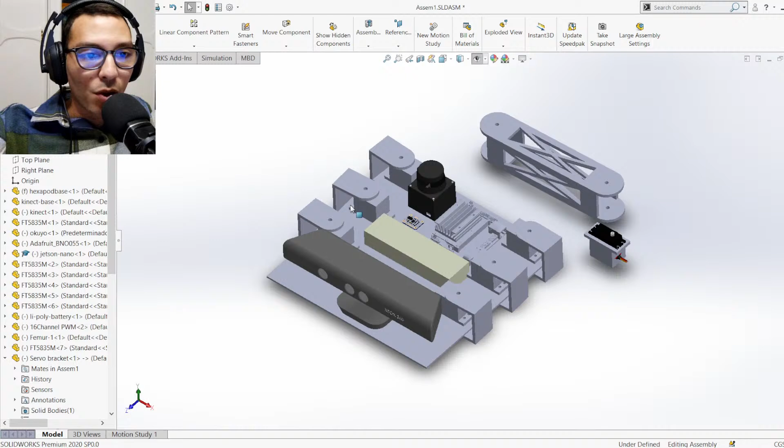But after that, in the actual robot there are gonna be 2 layers of this base. So the camera and the lidar are gonna be on top here, and all the electrical components, including the motors and stuff like that, are gonna be inside. There's gonna be another layer at the bottom with all the electrical components, and these motors are gonna be inside the actual robot, not at the top like that.

So this is just for adding weight until we figure things out. This is not even the actual battery, this is just a box, and I input the weight manually because I cannot find the battery that we need. Last stream, or the one before, I did Google it and showed what battery we're gonna use. I just can't find it on GrabCAD, and I can't be bothered to find it anywhere, so I made its dimensions and weight manually. That's all I need for now.

As well as this one, the NVIDIA Jetson Nano. As you can see, it's even here—I don't know if you can see that sign, this is like a graduation cap, so this is for educational purposes only. That's why it has no color.

I cannot click it. Like if I try to mate it, let's see if I can try to mate anything. It's not clickable, the entire Jetson Nano thing is not clickable. If I click, it will just click below it, or treat it as if it's not there.

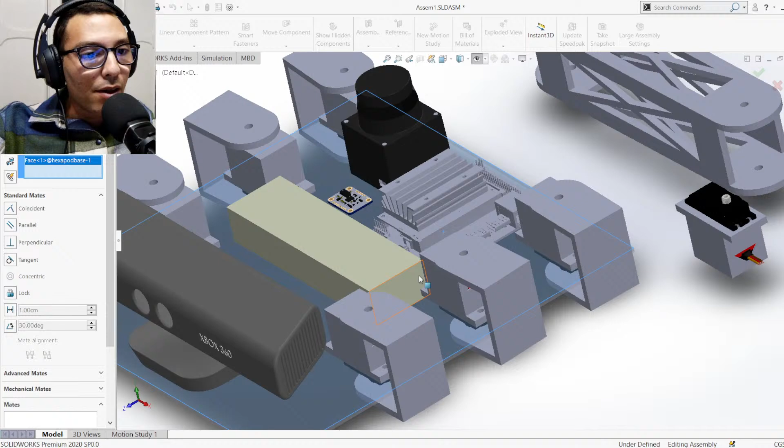So for example, this is not gonna be the finalized placing of the servos. Let me show you something—if I try to move this, this is gonna be the legs moving side to side. If I try to move this, let's say it goes all the way up here. We don't want it to touch. So let's say that's the furthest it can go this way. If this leg is already somewhere here, still not touching, great, okay.

So let's say this is the orientation I'm at right now. The rest of the legs here and here are actually gonna collide, so I'm gonna rearrange everything. This is just, as I said, a preliminary design to get the weights of everything. But this is not the end product, of course. There's a lot to do.

But hey, we're here to have fun, right? And to finish the project, of course. But first and foremost, have fun. That's all that matters to me, to be honest.

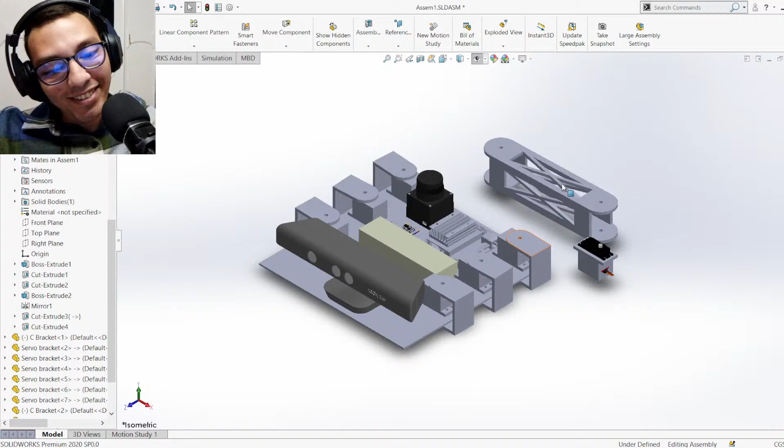So last time, all of this wasn't here. The brackets for the servos, which is the housing of the servo, we just tested it on this one, and we had this attached to it to see if it fits or not and all that. So in my spare time, I added the brackets to each one, and then I added the C bracket here to each servo. That's all I did. As well as, I opened up a space here for the cables to come out of.

So when we actually try to inject this servo inside the housing, it wouldn't be annoying, so I opened up space for it. I fixed the holes for the servo to be aligned with the housing. So yeah, that's all I did in my spare time. But to continue the stream, we're gonna try to connect these brackets to these servos, and then to the femur—that's the femur, right? I believe so, yeah.

Let me see where it is. Yep, it's the femur. Okay, so let's add another servo. We're gonna do this only for one leg and see how everything goes.

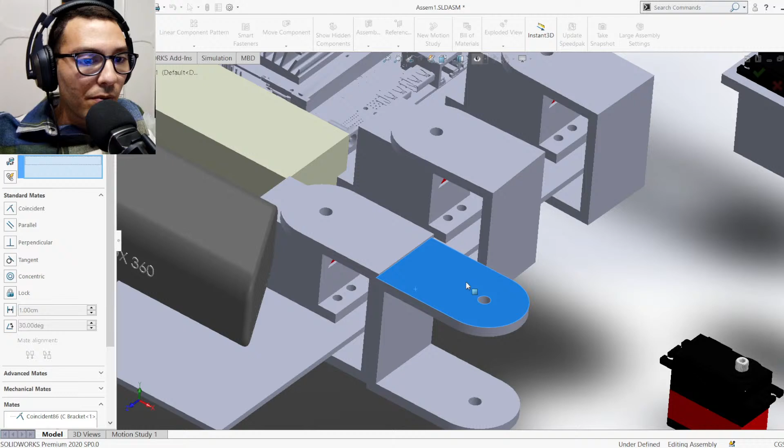So let's take that, space it here. We're gonna have to make holes for screws since all of that is gonna be screwed onto each other, but for now, just for the sake of it, we're gonna mate it right away. So let's mate this to this. Stop it. Okay, and I want to mate this to this. Yep, thank you.

With a distance of... what should be the distance? Let's say 10? Nope, that's... let's say 6 centimeters. Let's see how that... nope, let's have it be 4. Still nope. 4.5, I don't want it to be too low. Yeah, 4.5 is perfect. Okay.

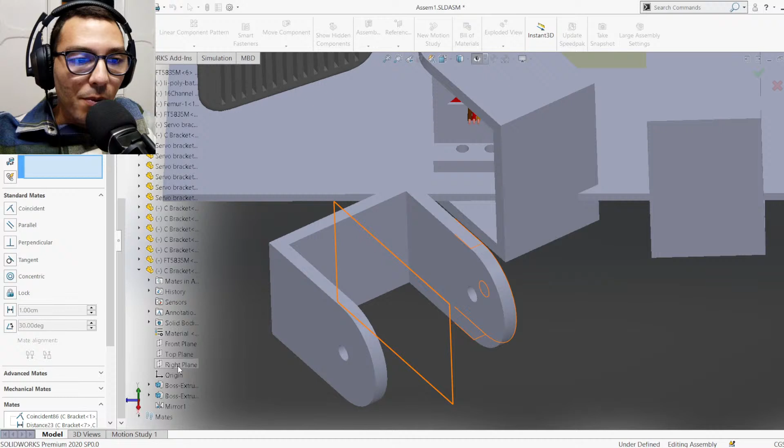Alright, nice. What else? What else can we make? Alright, so I need this, where is it? Yep, I need this to be in line with... where is this one? It's a C bracket, I believe that's number 1. Yep, that. I need this to be in line with this. Thank you. Come on, alright, nice.

Okay, that's actually perfect. Instead of... let's go out of this. Instead of this mate, that distance mate, let's do this instead. Let's mate this dude with this. Okay. Nice, so when this moves, this moves.

And now let's have this. Oh god, everything is starting to be slow already, because I have my OBS on to record and live stream, and then I have Solidworks on, with all these parts in Solidworks already making it slow, so yay me, right?

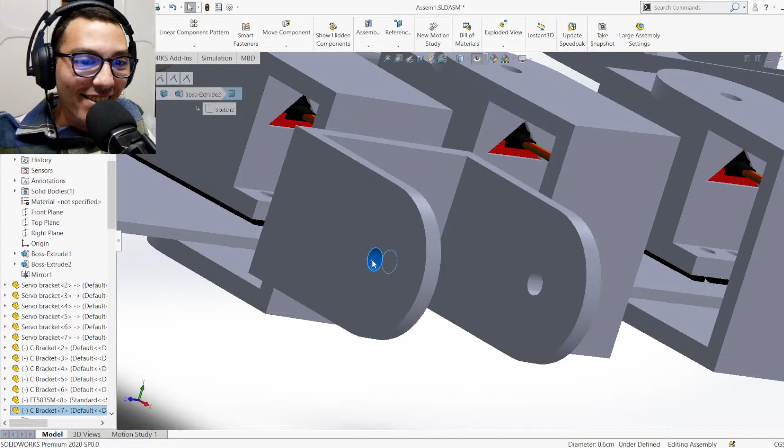We're gonna mate that. And that's a laptop, it's not a freaking PC, so... Okay, come on, you can do it. Come on.

Do I need this to be... yeah, I believe so. I think I'm just gonna mate this to this. I need this to be bigger. Yep. Or actually, yeah, I need it to be bigger. I'm not gonna arrange this one because this should have this. So let's mate this. Oh god, it's so slow! God damn it.

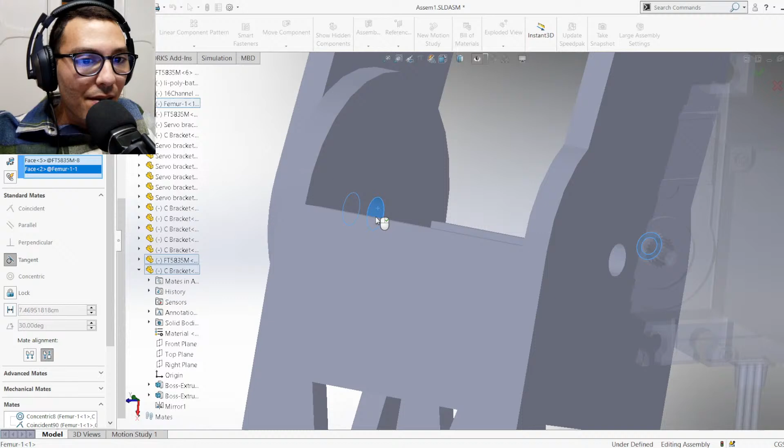This is gonna be concentric with this. Why tangent? I need it to be... oh yeah, okay, never mind. I'm just not gonna use this space, I'm gonna use this instead. Concentric. Thank you.

Where is it? Okay, so this needs to be... where? There. I need that to be here. Cool, now I need all of this to be inside. So I'm gonna have to have that face with this. Not that way. How about this? Thank you. Okay.

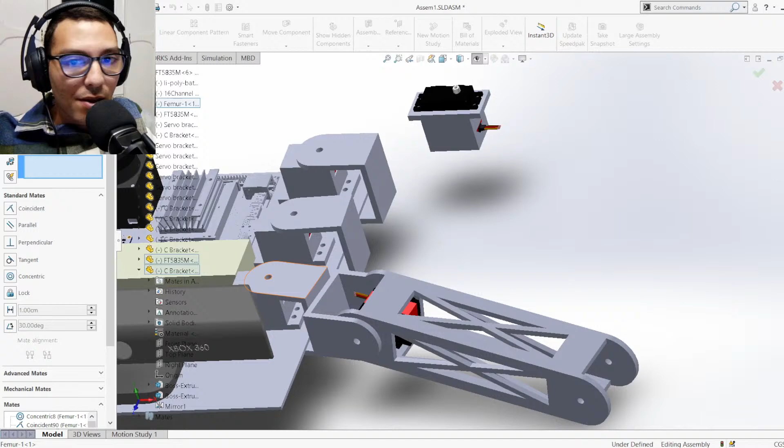So here's the gist of it. If this moves, let's see here. If this moves, so this servo, the first one, will move it right to left. And then this one, connected here to this bracket, will help this femur go up and down. We're gonna fix the dimensions later, because this is gonna take a while to actually figure out the actual dimensions, but for now this is the point. This is the gist of it, indeed.

Okay, now let's add another servo. Where is it? Where is it?

Too many stuff, and it's gonna only get worse. It's not gonna get better.

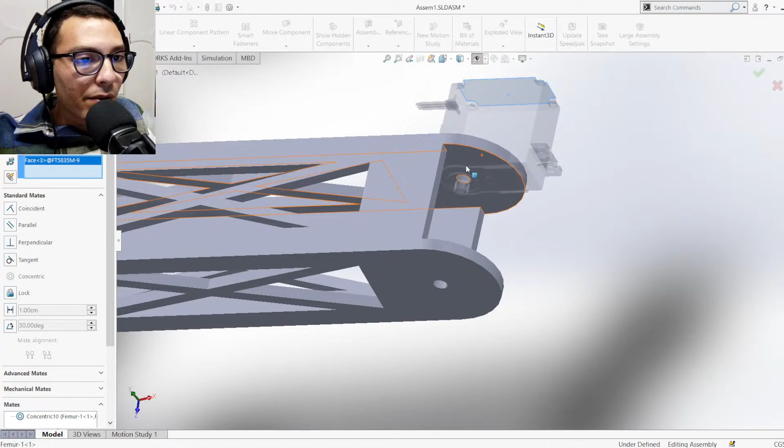Let's add... yep, there we go. Alright, I need this one to be here, with that to be here, just like your brother over there. And this one to be here, but the other way around.

So this one needs to be put with the tibia now. So we're gonna add the tibia. Where is it? Insert tibia. Please move aside.

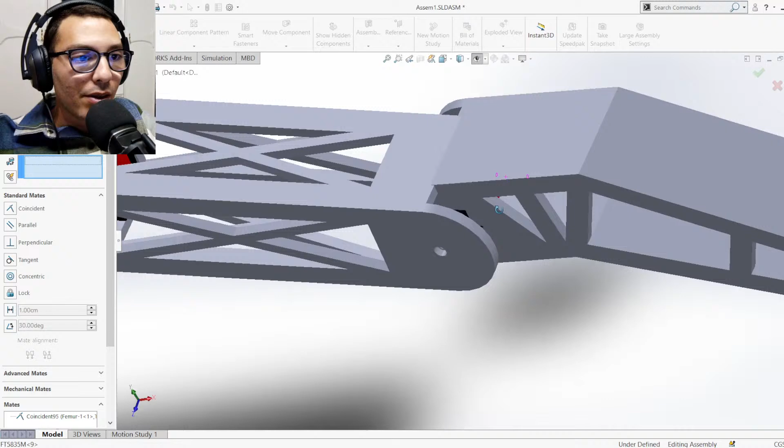And mate. And again, mate, with that. Okay, again, dimensions will have to be readjusted, but for now let's have it like that.

This is gonna have to be bigger. Yep, this is the one that's gonna have to be bigger. Okay, but you get the point that now this will be standing like this, and this will be down here. Hey, our first kind of clean view of what's gonna happen. Now we just need to do this 6 more times.

I mean, easy, right? I'm not gonna do it right now, I'm gonna fix the dimensions first. Let's have this to be a little bit smaller. So how small can this grow?

Let's look at it from here. Where do I want that? I want that to be... can I look at it from here? Nope, I don't want to. Can I look at it from here?

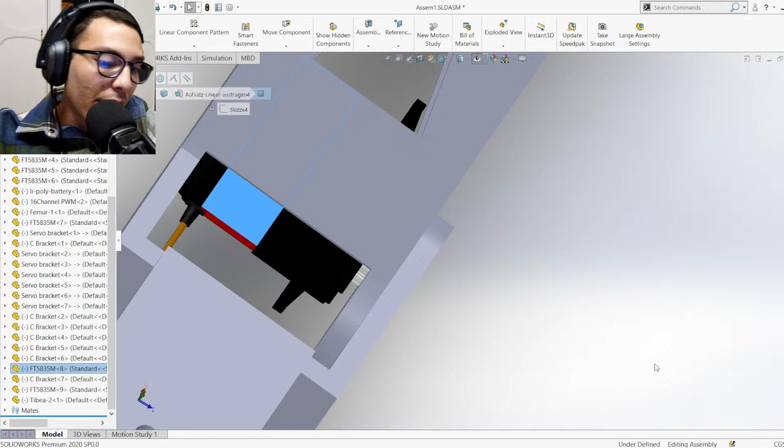And can I measure? Okay, I can get it to be from here to here. Please work, thank you. From here to here. Okay, I need the DZ, so I can get it to be 0.22 centimeters less. So let's open this part.

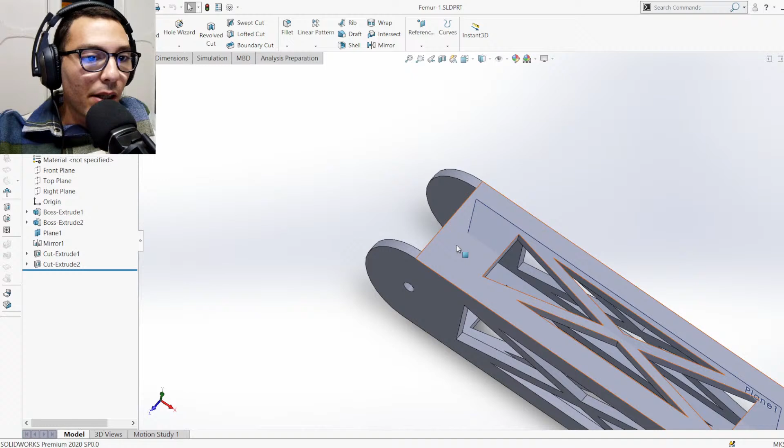Alright, I need that to be wider. So let's edit that sketch. Not that sketch. Where is it? Let's edit. Is it that? Yeah, it is that. Edit.

Guess I'm gonna have to edit the feature. Okay, so that's... what's that in... wait, I need it to be 0.22 centimeters less. So that is 4.5 minus 0.22 centimeters. Cool.

Okay, now let's go and check out what happened here. Alright, that's actually better. Femur 121 has rebuild error. Okay, thanks.

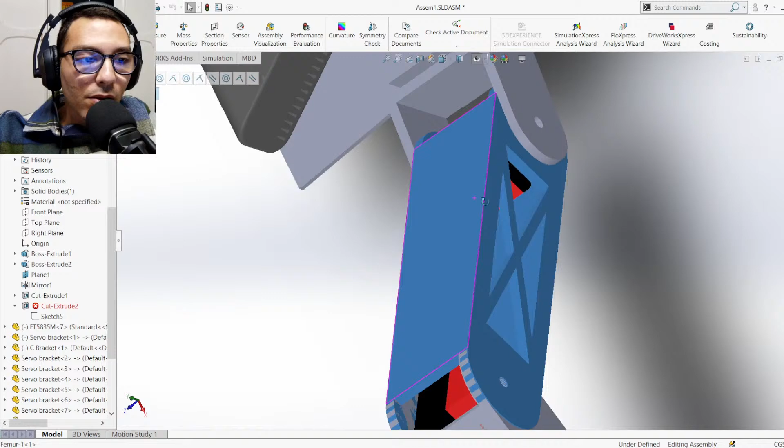Cool, well as we can see, it fits. Yep, that actually looks great. It might have to get a little bit, just a little tiny bit shaved here. But other than that, this so far looks great. So let's go back to the part and see why it won't rebuild.

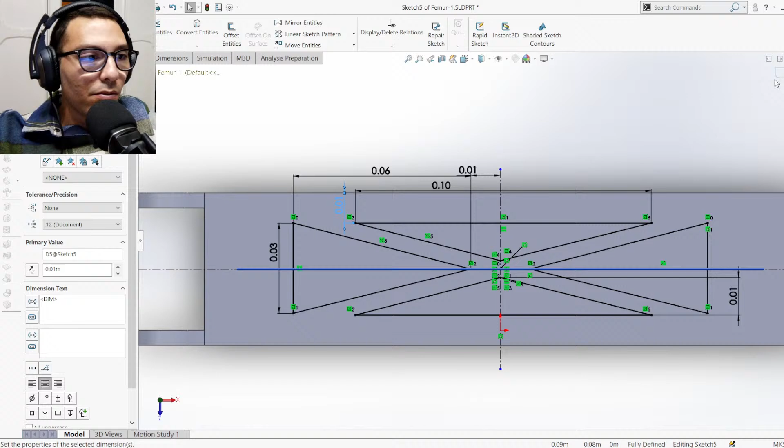Oh yeah, because of the extrude here. Now let's go edit that. Cool, that fixed it. Let's go see if this got fixed. Nice, let's go.

Now let's go make the tibia bigger. Where do we wanna work? Work it. Okay, I believe that's that. So we're gonna edit the feature as well.

Okay, so how much do we want to make it bigger, so it's exactly almost as big as the femur? So we want it to be outside of its... So I made it 5 centimeters, 5 millimeters thick this way, 5 millimeters thick that way. So that's 1 centimeter. So I want this to be 1 centimeter higher.

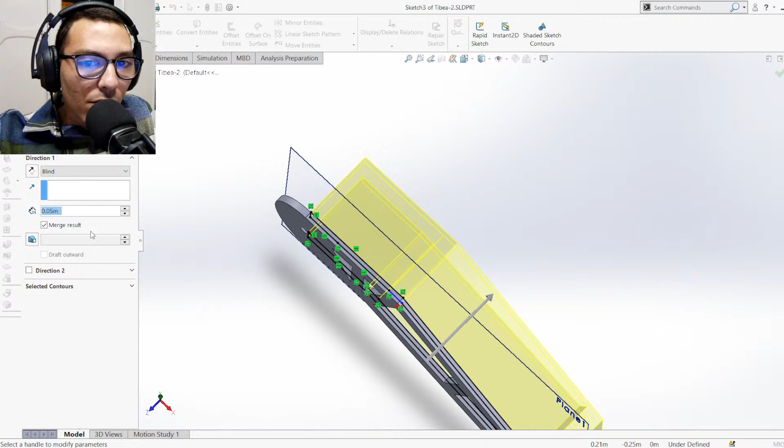Like that, I think. Okay, of course the cut extrude is not great. Now let's rebuild that.

Okay, where's the center of all that? Come on, are you kidding me, trying to get a point. And you... finally.

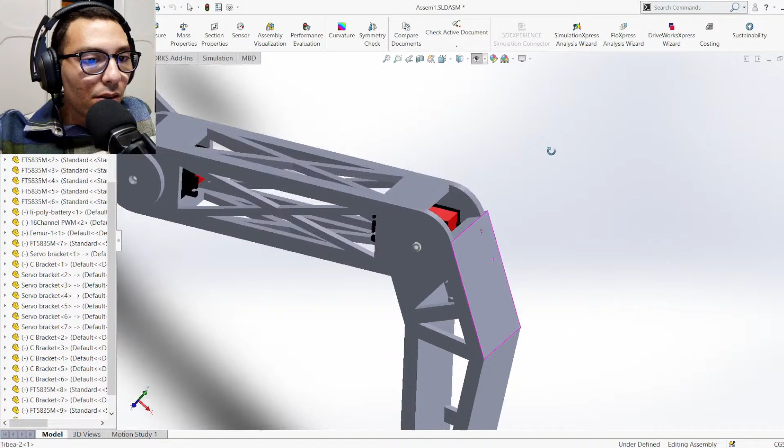Yeah, nice. Let's save that and go see what happened to this. Aw, come on. This should have been a lot bigger. And where the heck is the rest of it? What the heck.

Okay, we gotta fix that. Oh, I totally missed that happened. My bad, my bad, my bad.

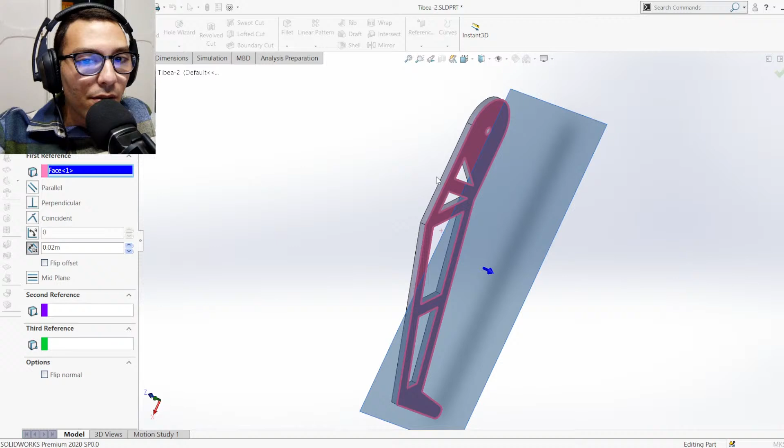First off, I'm gonna increase this. And that plane is not gonna be from here to here, it's gonna be from this face. Okay, let's actually remove the entire plane. Create reference plane, I want it to be the mid between those two.

And now I want you to mirror on this, and I want you to mirror that and that. Right? Right. Okay, much better.

Now let's go edit that. Are you kidding me? Then why are you like this? Okay, let's do that, just remove it entirely.

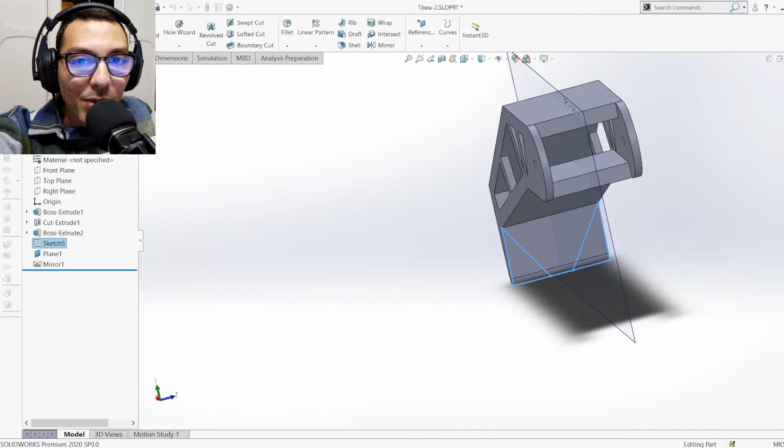And clear that, and extrude cut, through all. An entity with unsuitable geometry. Are you kidding me? Okay, remove the entire thing. Let's work on that. Extrude cut, that face. Yeah, let's go.

Nope. I want... come on, I want the one inside there, which is from here to here. Yeah. We did say 0.015, so let's make it 0.01. Yeah, sure, why not?

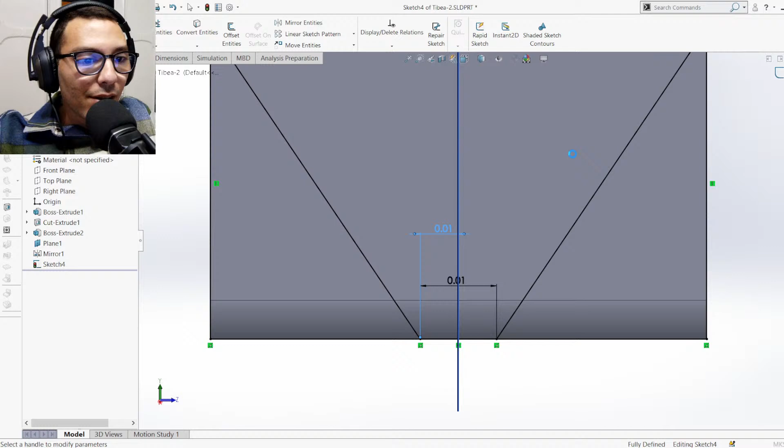Let's do this. 0.005. Nice. These through all. Nice.

Let's save that and go see what happened here. Nice, let's go. Okay, in that, we're gonna remove one of the mates, which is this, and remade it to be this and that. Much better, yeah. Nice.

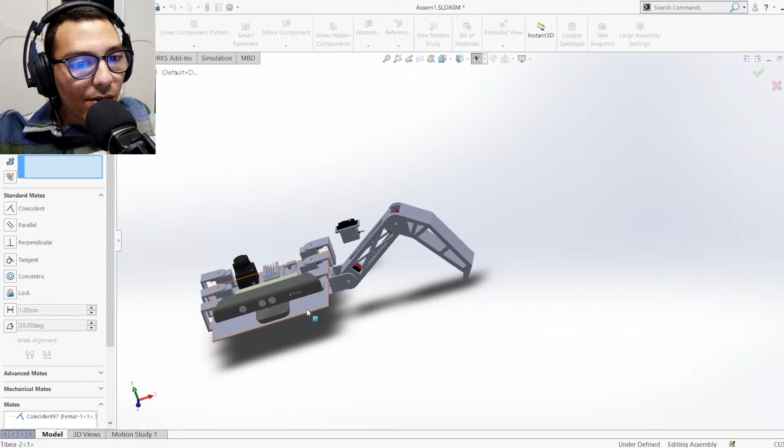So, this is how it should look if it's standing up.

That's long. In proportion, that's a lot longer than that. But, hey, it might do something like that as well.

So we need it to be that long. So if we're looking from this angle, and just in case it has to go flat like that, that's exactly what we need. So you see that? This has to be higher than this.

Actually, I might have to shorten that. So if I shorten this, this goes down a lot, so it can touch even below this. You see what I mean here?

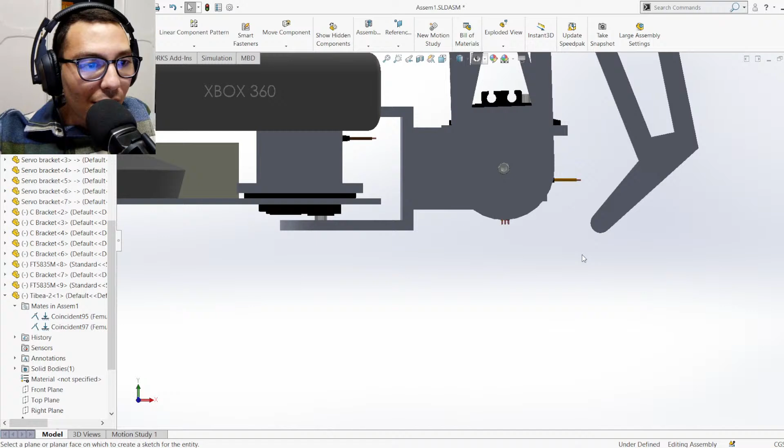I was gonna draw a straight line to show you, but never mind. You get the point. Let's say this is the floor. I need this to be touching the floor first instead of the belly of the robot. So we might have to make this shorter. But for now, let's just keep it as it is.

And yeah. Okay. Huh. What else? What else? What else?

Oh yeah, the thing I was showing you guys earlier - when this goes this way to its max position, here, it will hit that ledge. If this leg even tries to go to its max position this way at the same time, for any reason - I don't know why they might have to do that - this is gonna be a problem.

And this isn't even me putting the other bracket - I didn't even put this bracket here yet. So they are gonna collide in that case, 100%. So this will have to be fixed. For now, let's just keep it as it is.

And drag that back. Okay.

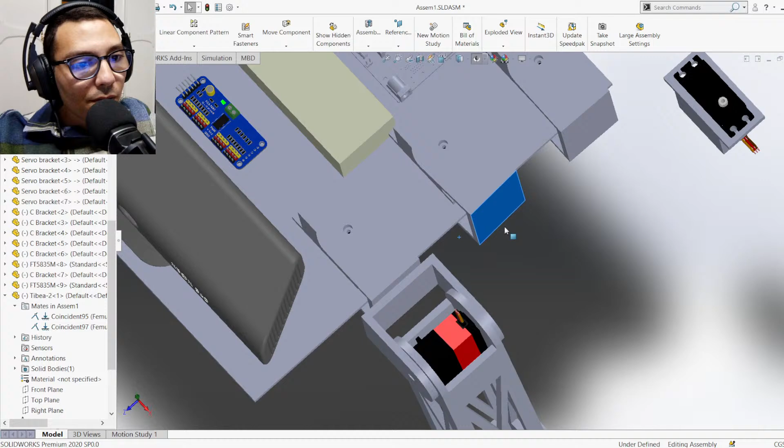It's gonna look like a proper spider with time. But that's the grind, right? That's literally it - to keep trying these things and keep checking out more stuff.

So we don't need that, actually. What else do we want to do? I forgot. Oh yeah, let's fix...

Actually, I want to do all parts first. So let's add - let's do this. This. Nope. Where is it? I think it's that. And...

Where is it? I don't know if this will work, but let's do this. So a femur and this, that, and the tibia all copied and pasted here. Yeah. Do they have their mates? They do.

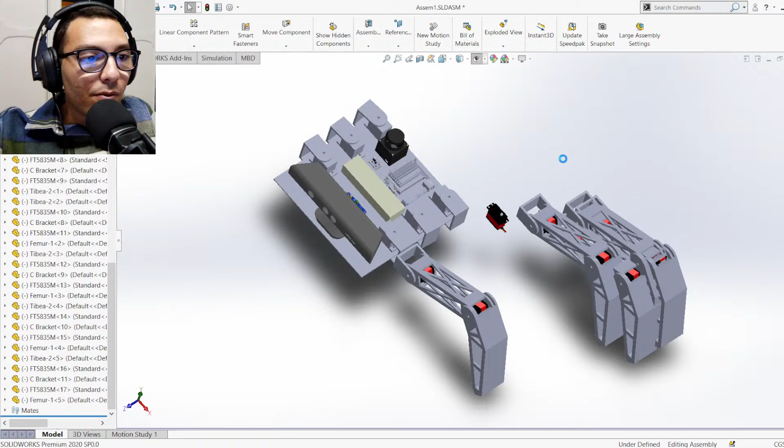Great, let's do this 3 more times. Yep. It's a bit clunky, but we're gonna just do that.

Okay, let's start mating. Hey, no, not like that. Not like that. Okay, chill. Not like that - I meant to mate the parts in SOLIDWORKS. Good God, working this is gonna have me arrested.

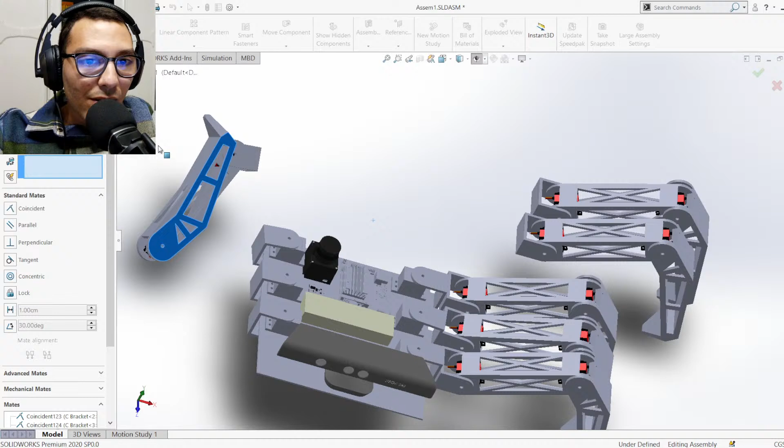Huh? Okay. Weird. Anyway. It's so freaking weird. Yeah.

Let's go. Where? Oh god. Um, what's that? I don't need femurs, I only need C brackets. Okay, this C bracket.

Okay, so we're dealing with the right side of that, with - okay - this right side with front. Okay, and then that right side of that with the front of that. Great.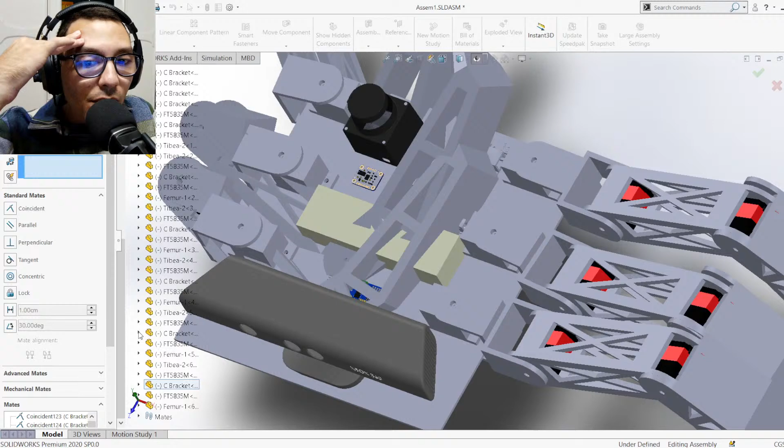Okay, next. This C bracket. Oh god, no, I want this - C bracket 10, right side, with C bracket 3. It's supposed to be right. Nope. With the front. Thank you.

And then right side of that, with C bracket 10, front. Okay.

Oh god, no, what did I do? Wait. I want to fix this first, because I want to have at least one side that's perfect. This edit feature.

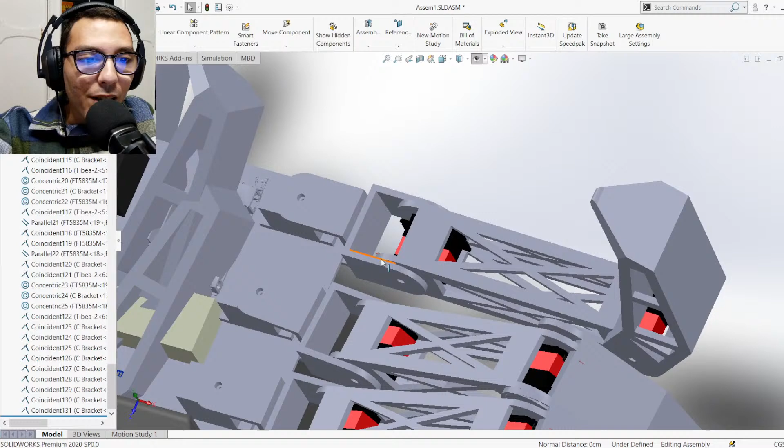Can I have them flip? Okay, but I wanna flip them. Nah, nah, please, nah. Okay, why? This, yes.

I need it to look the other way. Come on, how do I do that? It's supposed to be like that. How? How? How? Just how? Huh? What?

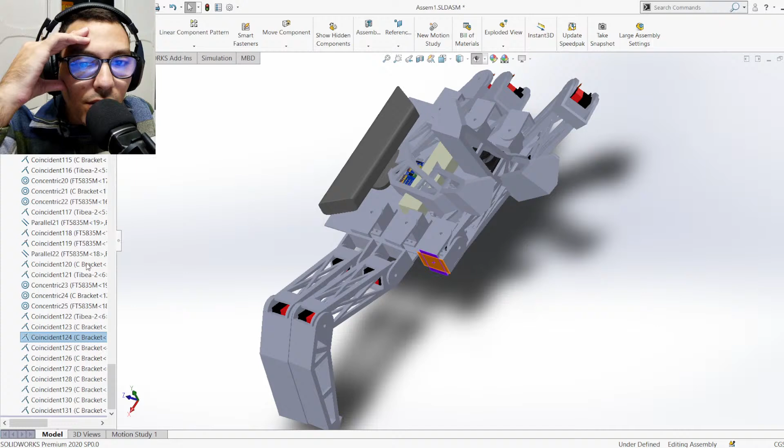Okay, let's see this mate then. Where is it? Yep, that mate - if we do this. Come on. Okay. Yep, that should fix it.

Thank you, thank you, now stop being an idiot. God damn, you had me scared for a sec. Okay, what were we doing? Oh yeah, these. Good God, man. What's that? 4 and...

8. Okay, 4. Where's 4? C bracket 4, front, with C bracket 8.

C bracket. Come on, 8, there it is. Okay. This? Nice.

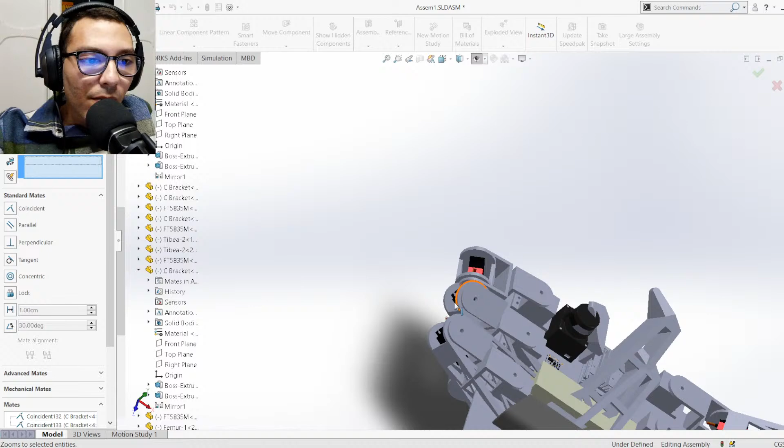Okay, now front and right. Nice. Okay, we got this, we got this. Okay, okay, huh, this feels exhausting, by the way. Just saying.

One wrong move and all of that is gone. 5 and 11 - 5 and 11, nope, that's a femur. Get back here. Chrissy, wake up.

Okay, that - right side. 2, that's front. Nice.

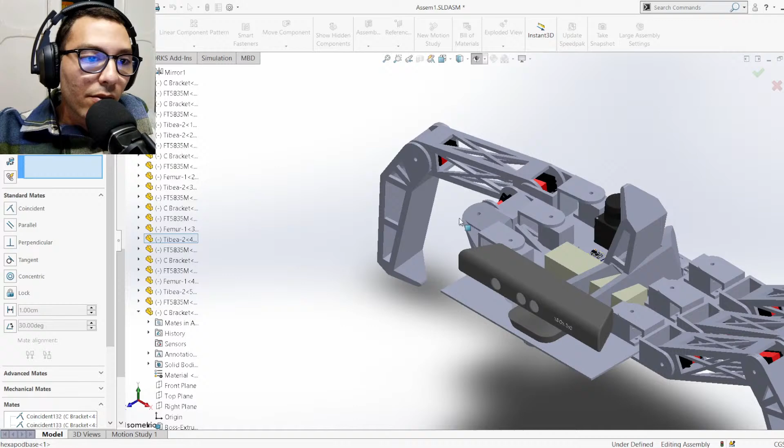And then that right to that's front. Okay. Not too bad, not too bad.

Okay, get down, thank you. Last leg, last leg. 6 and 9.

Where are you at? C bracket 9, and then C bracket 6. This front to this right, and then this front to this right. Thanks.

Wait. Can you stop? Thank you. Okay. Freaking finally. Hey, we're getting somewhere, kind of.

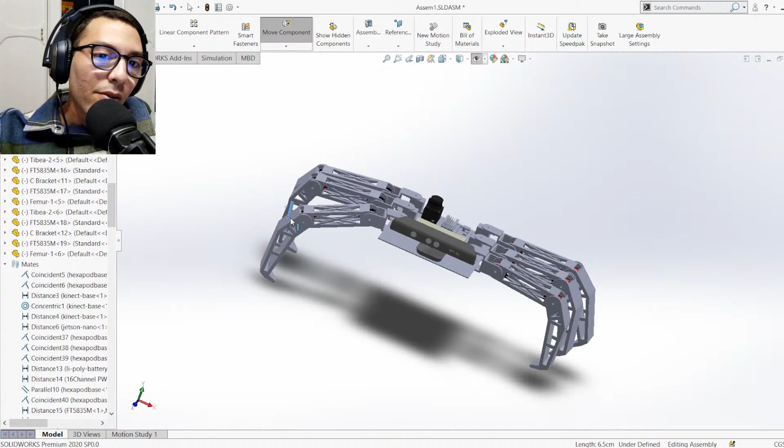Let me actually do this. Nope. Let me check this out. I need an isometric, trimetric? Yep.

I'm gonna just screenshot that for a bit.

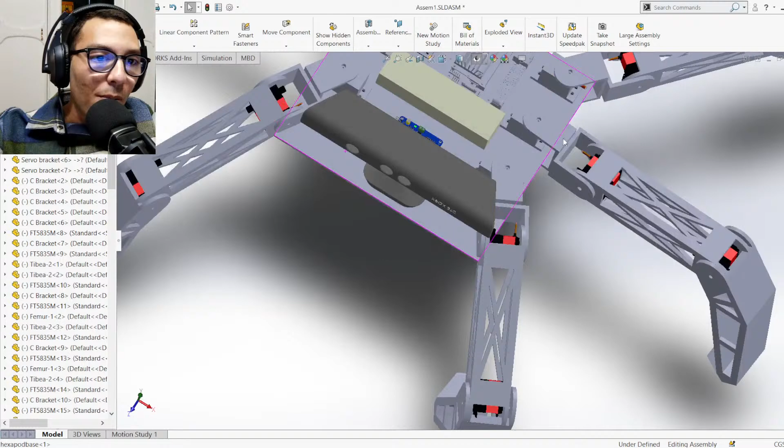So all of this is gonna be shaved, like this entire place is gonna be shaved, as well as that place, as well as the ends. These are gonna be separated more apart, so this entire thing is gonna get longer. But for now, so far we're looking good.

What else? Not really sure what to start with. So basically, we can start simulating, kind of. We can make everything defined and then start simulating. But to make every single part of this fully defined is gonna be kinda hectic. So let me see what else can happen here.

So what do we have? We have a mate here, doing this and this. Then we have a mate here. So how can this move? It can move sideways, okay. Can it move upwards? Nope. It can only move sideways. Okay, let's have that.

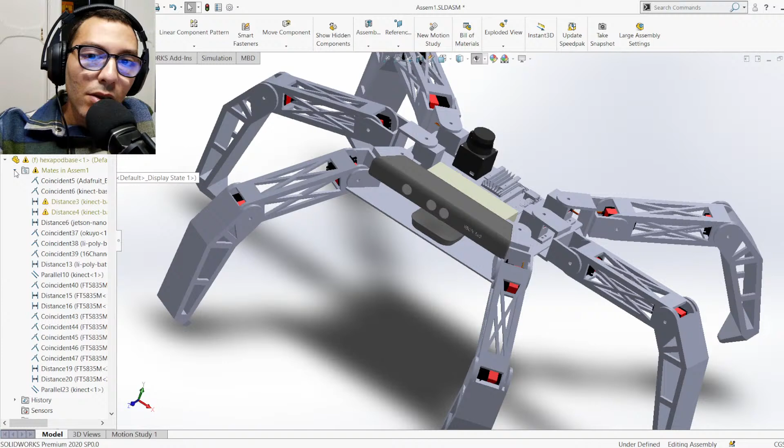Okay, but if I don't do that mate, it's gonna move. So let's say we delete this mate. Now this can move. Well, we can actually not do that mate.

Um, what else? This can stay as it is. All of that can stay as they are. If I try to simulate just like that, everything's gonna collapse. Or not collapse, it's just not gonna be working well or give accurate data. So we can do this.

Where did I go to start simulating some weights? Okay, first we need to make sure that this— oh yeah, simulation, cool, new study. Wait. This might make everything burn out on me, so we're gonna save and hope for the best.

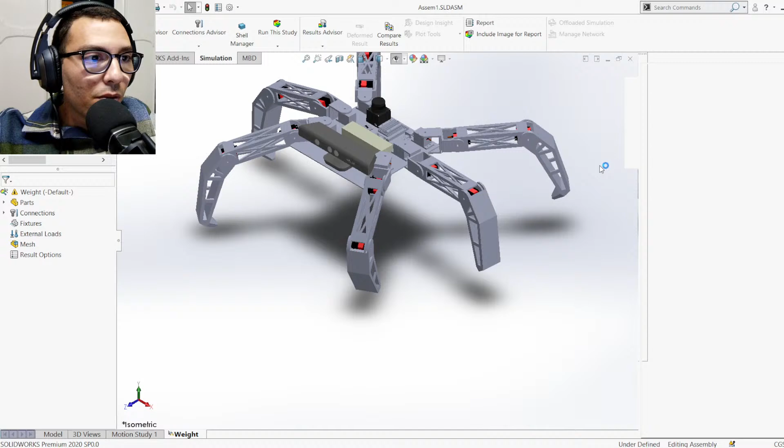Okay, so where do we want to fix this thing? Okay, fixtures. Nope, not that, thank you. Fixed geometry. Okay. Actually, in real life this is gonna be standing on those, so let's fix it there and see how this goes.

I know it's not fixed, like I know that the entire thing is not fixed on the floor actually, but just bear with me, I'm testing some stuff here. What's up, Farid? We're kinda simulating something. It's gonna be so bad and everything is already moving very slow, so just bear with me.

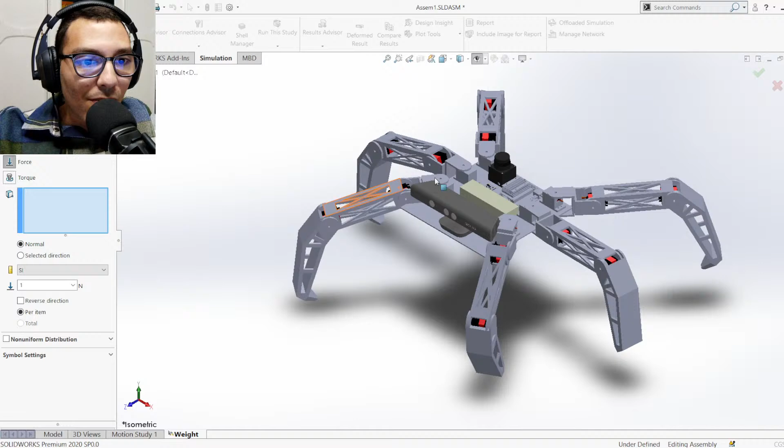External load, it's gonna be force. Let's say this entire thing is 5 kilograms, that's applied here. Let's say, actually, one sec. Not sure which one I should go with, but let's go with force. Let's keep it simple, applied here. Yep, SI, let's do 5.

Yeah, it kinda does look good, but as you can see, a lot of stuff are clipping through each other. All of that's gonna get fixed, but so far this is how everything should look. This is gonna get shorter, the femur is gonna be shorter, but this is how everything should look.

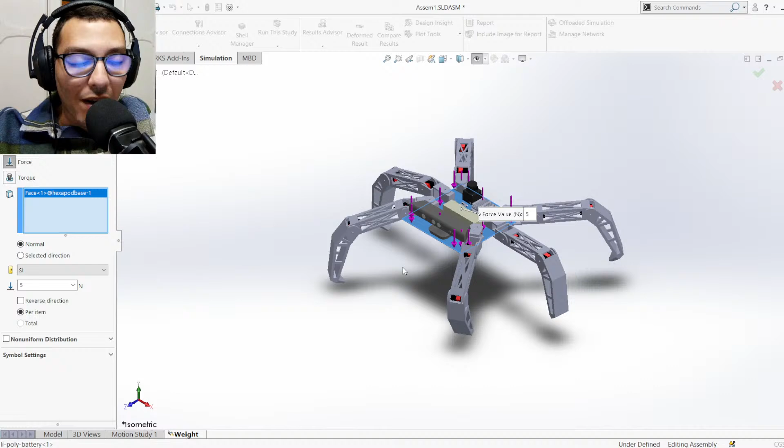Fixing everything to be fully defined, as in mate everything, is gonna take a lot of time. So we're just gonna kind of see what happens if we try to do this without much fixtures.

Okay, let's try to mesh at— let's try to mesh at 4. Oh okay, thickness is not defined for one or more shells. Great. Actually, it's not gonna mesh at 4 because it's not gonna be able to mesh this. Which is the problem?

Let's see, thickness is not defined for one or more shells. Well, if this doesn't work I'm gonna try one more thing. So 0.5 centimeter, which is the thickness. Okay, I don't think this is gonna work like that, so let me try something else then.

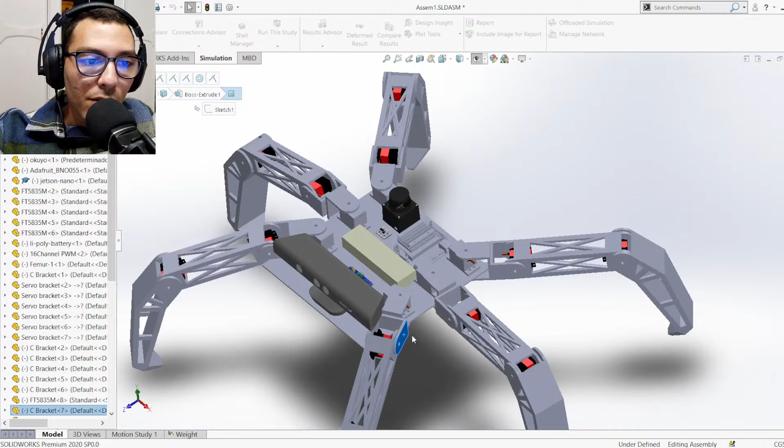Where was it? Here it is. What's that? So that's gonna be C bracket 7, plus this, plus this, and this and this. So these are the things that I need. This, that.

Yeah, form new subassembly, that's exactly what I was looking for. Ah, I'm glad it's there, because I wasn't sure that this could be done. So yeah, this I need to open that subassembly, and then we're gonna simulate that.

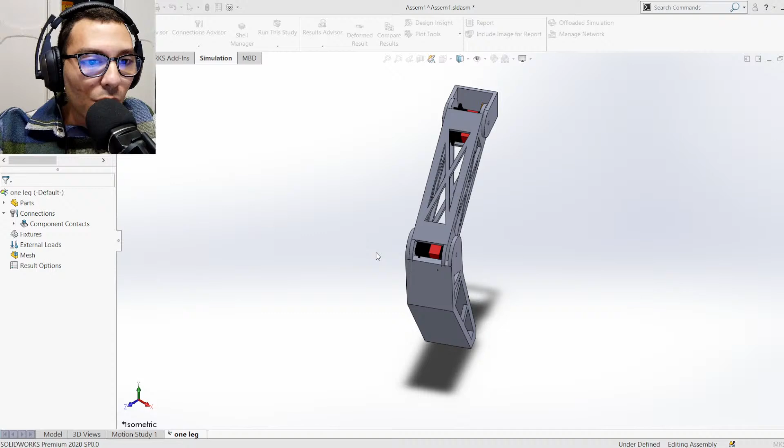It's the servo. Okay, both servos failed. Refining of the mesh. I know why they failed. Trying to know why they failed. Because I meshed on 2 centimeters, and then we have these. It's trying to put 2 centimeter triangles in here, but it can't. As well as these, it won't be able to do that. So,

For now, what we did, let's just see here. Fixtures, fixed geometry. It's supposed to be fixed here, because that's what's touching the floor. What else? What was I gonna do? External loads, yeah.

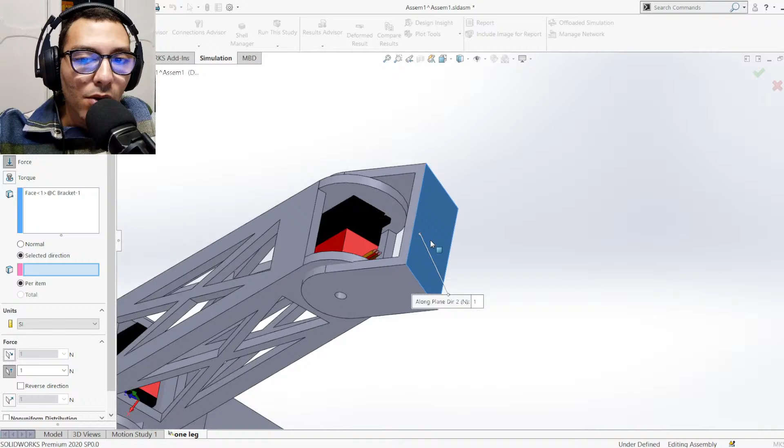Where external loads, force. It's on this. Select direction. Want to see it though. Why won't you show it to me? Weird. Oh, because I didn't click, my dumbass. It's the reverse direction

of, let's say, 5 divided by 6. Let's say each one will handle 3 newtons. Each one will handle, let's say, 2 newtons. 2 by 6 is 12. Yeah, the entire thing is gonna handle 12.

Or in some cases, because let's say that this spider is walking, right? So only 3 of its legs is gonna be touching the ground at a time. Let's say there is one of the patterns that will have 3 legs off the floor and 3 touching the floor at a time. So we need the entire thing to be held on 3 legs. So let's say 10 divided by 3, that's 3.333, yep. Let's say 3 newtons.

What else? What else? Don't think there's anything else. Here. Well, that stopped my camera.

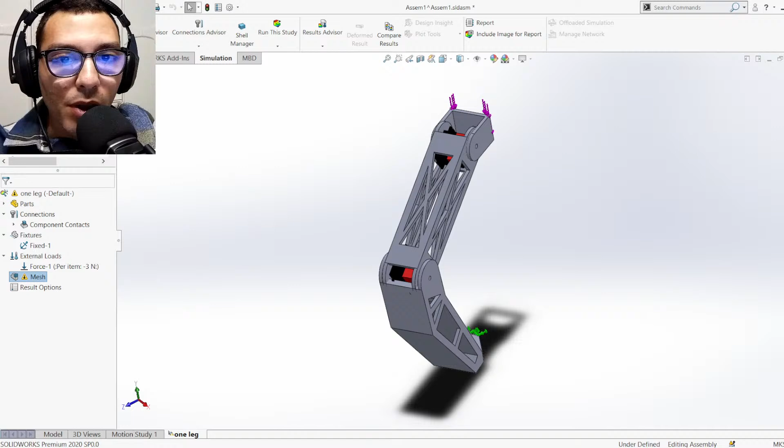Okay, so we meshed. Create mesh and run. And let's see what happens. It's not gonna be great until we solve a couple of issues. I'm gonna have to remove the servos from the mesh. So let's suppress that.

Whoa. Why you do me like that? Where is the wrist? Brother, what are you doing? Hello?

It's not suppressed. These are the ones. Okay, let's just suppress that. And that. Okay, now mesh and run.

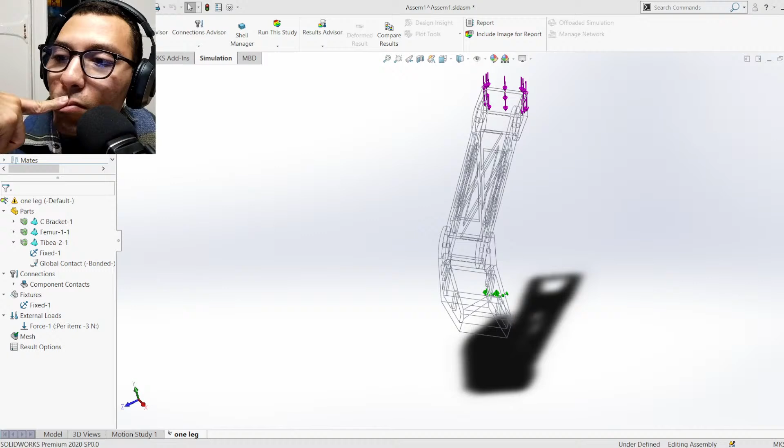Okay, let me show you guys this. How can I show it? Add image source. Nope. Yeah, that. Why won't it show? It's not showing. Huh, okay. Give me a few moments to figure this out.

Okay, for now we're gonna have to work with this. So anyway, we're using PLA. So I got the data sheet for PLA. So we can actually just go here, for example. We're gonna go where? So we're gonna go here and tell this entire thing to make it out of, change material.

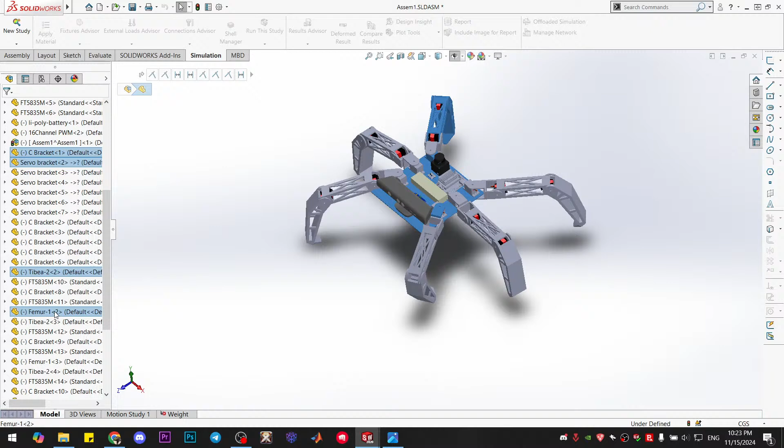This is what we're gonna do right now. This, nope, not the base. What else? The base. The bracket. The servo bracket as well. Tibia and the femur. So all of them, we're gonna make material.

Where is the material one? Yep, material. Let's just add the femur. Yep, thank you. Material, edit material. Custom material. So PLA is a kind of plastic, so we're just gonna add new material, call it PLA. It's not already in here.

Is it? Oh, ABS is in here. Huh, so PLA must be in here. I genuinely cannot see. Where is it? PVC, PVC. Yeah, it's already... I'm in plastic right now. Anyway, PLA and ABS are kind of the same thing, so we're just gonna use ABS.

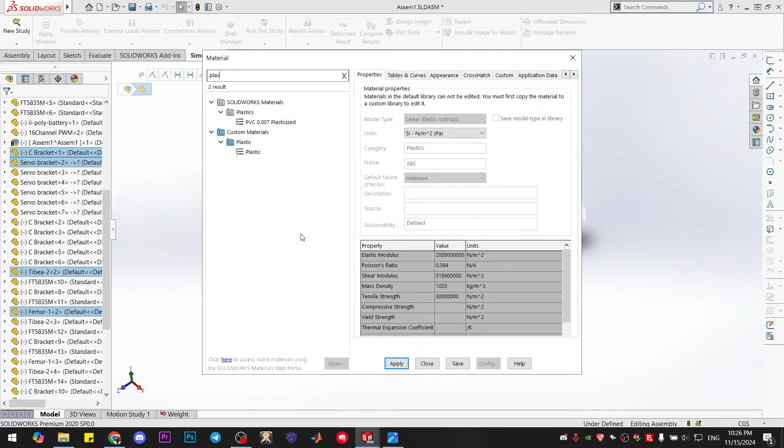And there is... You mean the plastic I made? Or the plastic, this PVC plasticized? Because this plastic I made, this one. This isn't the custom materials that I made, so that's why I just went for ABS. You have changed custom materials, they want to save. Nope. Oh god, that's too bright. Good god, man. Ew.

Anyway. That works. Yeah, ABS is very close. It just looks horrible. But anyway,

Yeah, so since we switched to that, let's go back here. It should fix everything now for the simulation because we added the material. So go ahead, mesh and run, my friend. Oh yeah, this is gonna fall from over there.

Iterative solver stopped, numerical difficulties, pre-condition failed. Please check model boundaries and conditions, no results saved. Assembly 1 failed. I know, because I didn't fix everything in place.

So if, realistically, what's it telling us here is... I'm not really sure why my camera is not on anymore. Give me a sec. Yeah, way better.

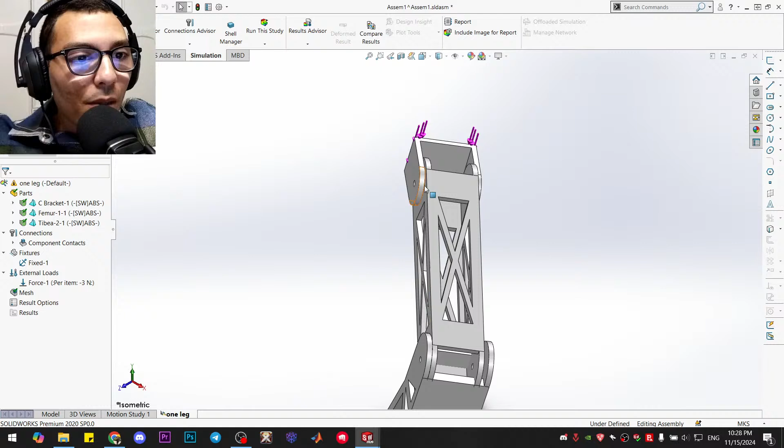Okay, so basically what it's telling us is this. If I apply pressure here, let's do this. So if I apply pressure here in real life, and this is fixed to the ground, I didn't tell it that this is gonna have a servo here that's actually holding it in real life. But to the simulation, if it applies pressure like that, it's just gonna fall apart.

So if you go here, if I apply pressure, it's not doing what I want it to do. Let's look at it from this angle. If I apply pressure here, this entire thing will collapse, so it will close in on itself. That's what it's trying to tell us, because it's not fully defined. As you can see, the dashes here mean that it's not fully defined, so I have to fully define it first and then tell it to simulate.

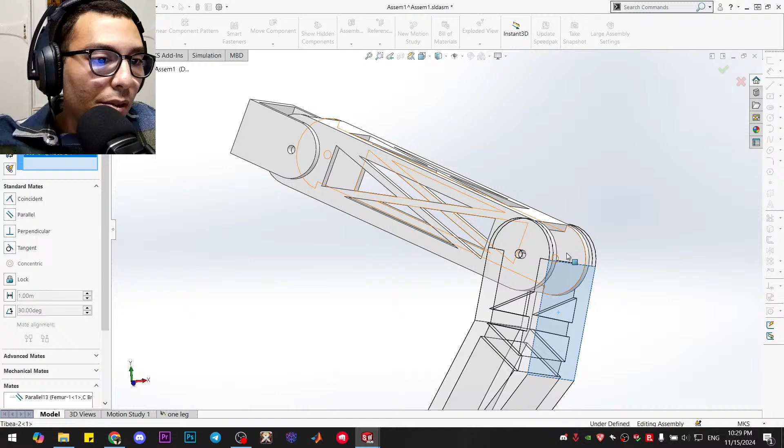Okay, so let's make a couple of things more. Let's have this like that, just for example. I don't know what else it wants, to be honest, because mating this and this and having it concentric here should do the trick.

So if we go back here, see, now this is made like that. See, it's not going down or up anymore, it can only go sideways. So this should be fully defined to itself as a sub-assembly. But I'm not really sure what's going on regarding this.

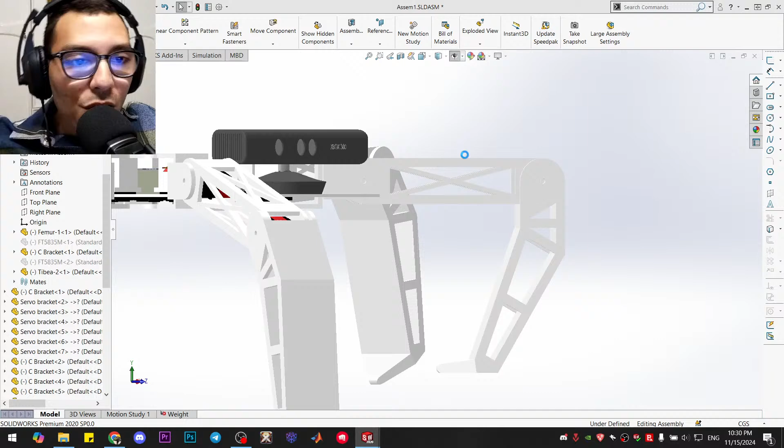Save, enter inside the assembly, save it in specific path. Nope, save inside the assembly. If anything happens, we can just fix it again with no issues. So for this one, see, it does the movement that it should do, but this one isn't doing it because I fixed it with the last mate that I just did. I'm not really sure what's going on. I'm gonna have to look further into this, but for now, I believe that's great progress, what we just did.

So inserting everything, actually we can add one more thing before I finish the stream, a couple of things actually. As I said, if we look at it from this angle, let's move that aside. If we look at the entire thing from this angle, the reason I say that this, the femur, should be shorter is in case this happens.

Okay, you go up, you come down. In case the spider needs to stand like this, I need this to be touching the floor first instead of the belly of the spider. It's almost touching the floor, but this is going to be scraping the floor as well. I need the entire spider to be held up on the legs. I don't want the belly touching the floor at all, so I'm going to have to shorten this part.

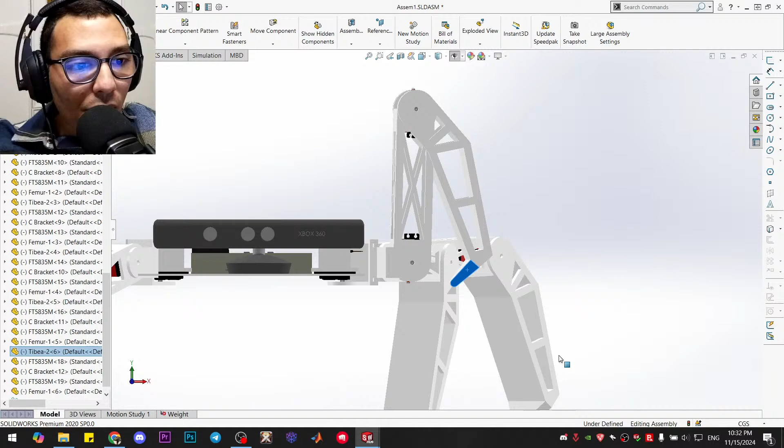So all of that will get a little bit shorter. If that happens, the center of this will go down a little bit, so this entire thing will go down as well. That will fix our problem. As well as I need to fix another dimension, which is this.

Because this is suspended in air right now, as you can see, just suspended in air. As well as we're gonna fix all of that, of course, like this is clipping through this, I realize that. This is all gonna get fixed later, but for now we need to fix these two things. So make this shorter, and make this a little bit shorter as well. Let's go do those. First, let's do this.

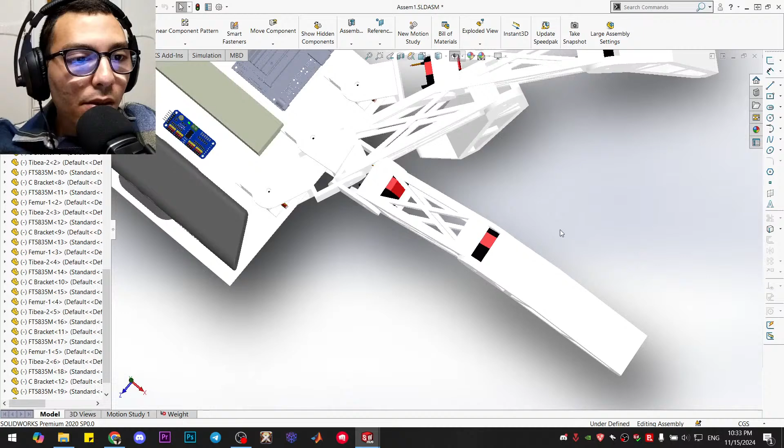So apparently 0.5 was right. Let's go see how that affected this. Yeah, the angle of the leg. Huh, okay. So 0.06 is too far, 0.05 is too short. Let's do 0.055.

Come on. Yeah, much better. Still clipping through, I can see it, but it's much better. Getting this very accurately will take time to measure all of this here and measure the actual dimensions of this. But so far everything's going great, so no need to sweat it.

Now let's make this shorter. Or actually, while we're on that part, let's fix the angle, increase the angle, which is this one.

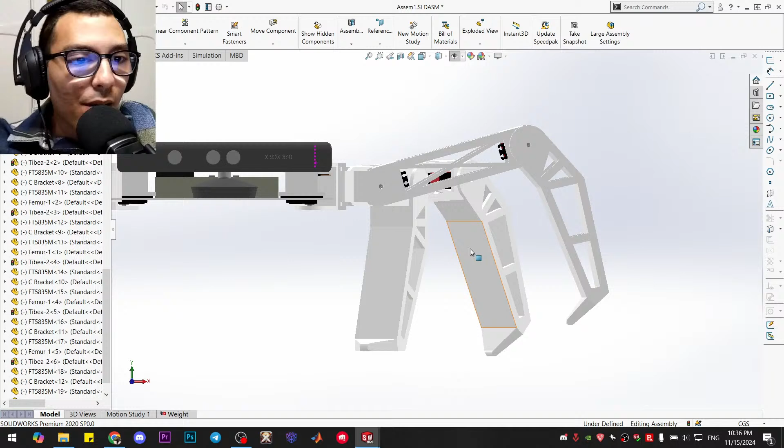Okay, so let's see what happens if we have this to stand like that and this to stand like that. Yikes. So I just want to see the position if the entire thing is flat.

Okay, stop freaking out, please. Huh, okay, yeah, the angle does need to be fixed, because in order for this entire thing to be flat on the ground, this leg will have to look up more than it should. So if it's something like that, this will have to look... So this is the spider flat on its belly with this angle.

I'll increase it a little bit. Yeah, sure. Let's go do that. Nope.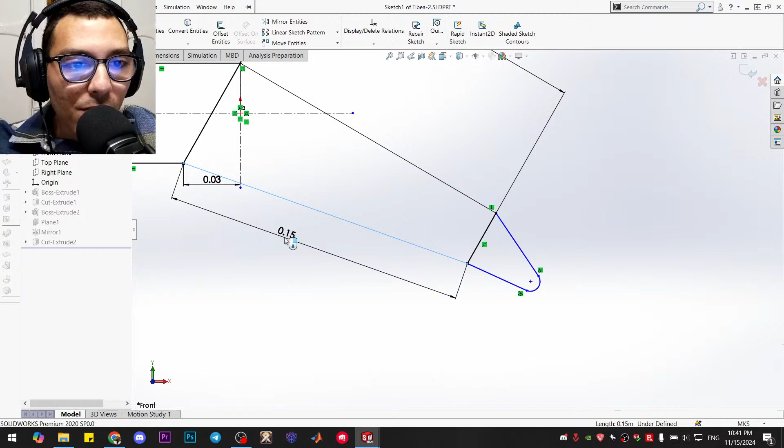Discard everything, forget everything you know. See this, once it loads. So once the spider is in its flat position, flat on the ground on its belly, this is gonna be flat, this is gonna be flat, and this is the old tip that I have. I didn't increase the angle yet. If the entire thing is flat on the ground, this is gonna be touching the floor like that, in that position.

So, do you think the angle should be more to the inside or to the outside? I think you meant going outside a little bit more, but I'm not really sure. Let me know, yeah, more to the outside, right? So if it's on the outside a little bit, this will go down, like this will do this. This is on the outside here, on this place, something like that. Yep, okay.

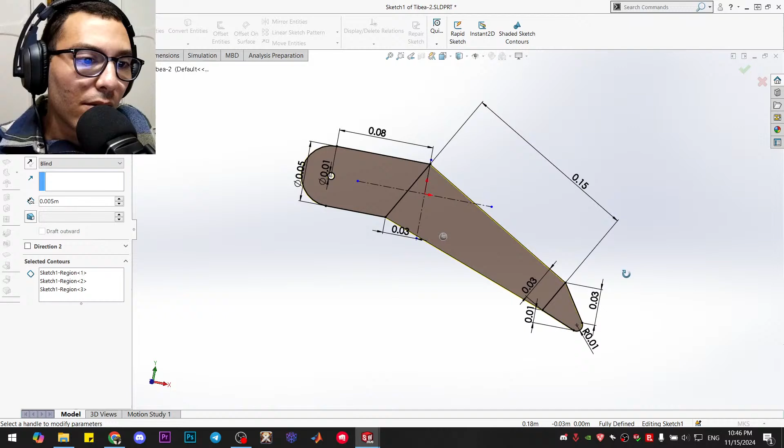Nope. Just as it is, thank you. Huh? Still not fixed, what? I don't get it. Okay, that's weird. Oh, I get it, okay. Hi.

The design is coming together so well. I'm genuinely so proud of what's coming to be. Hey, thanks, it's gonna be great. Don't worry about a thing. Everything's gonna be great.

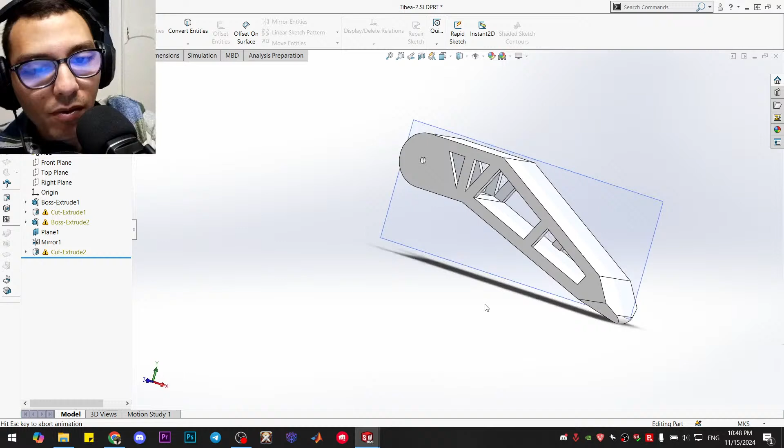Okay. Huh, okay, but this should be fine. The sketch contains the dimension related to model. Okay. Why is this an issue?

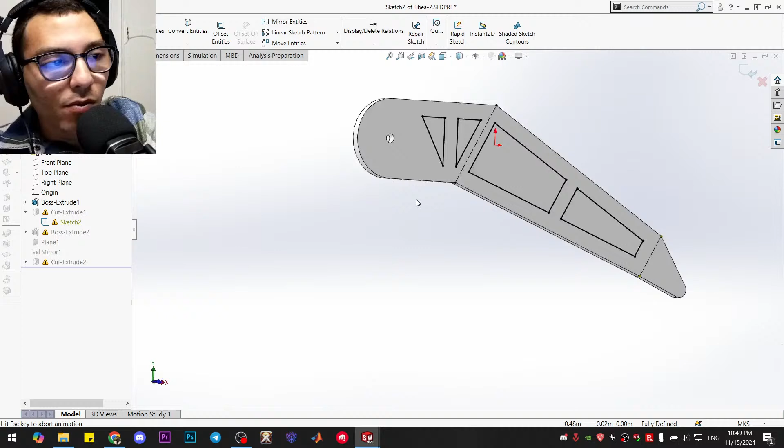Okay, one down, one to go. Two to go. Let's check out what's around here. I genuinely don't see it. I don't see what's wrong. Oh, there it is.

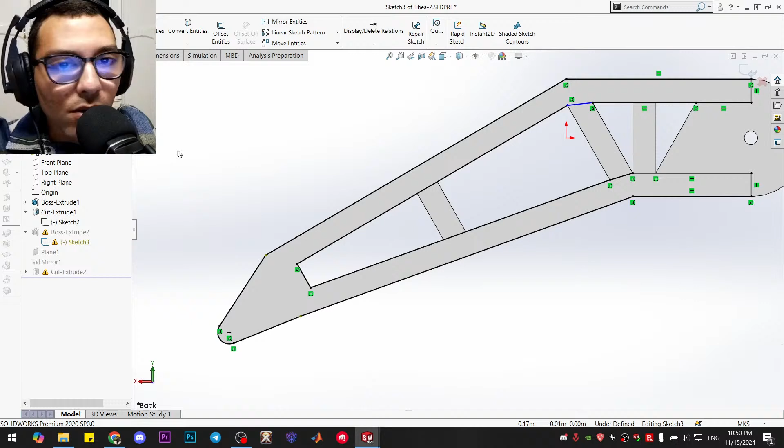Trim. This and that. Okay, trim. Fixed, and next. Yeah, boy.

Okay. What, couldn't find face or plane. Um, let's edit that. Edit sketch plane, so take that plane, and now you're fixed, great.

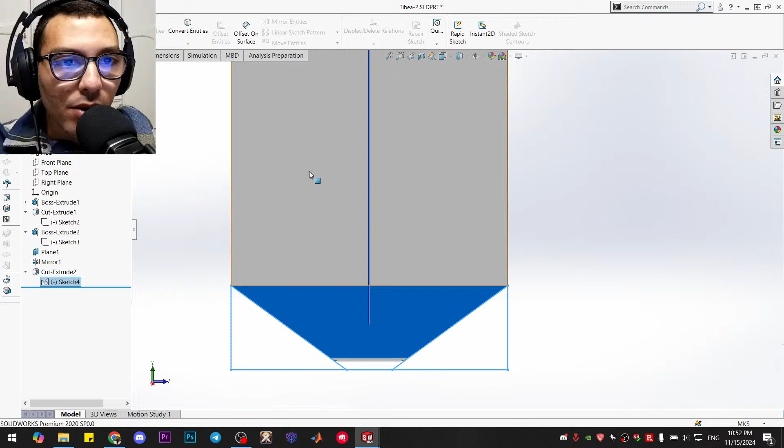Thank you. This is how it should be now. Perfect, just perfect, perfecto. Way better. Much better.

Now, that's it if it ever... nope, not that, not that either. That's how it should look like if it ever decides to stand up. I'm still gonna make this a little bit shorter.

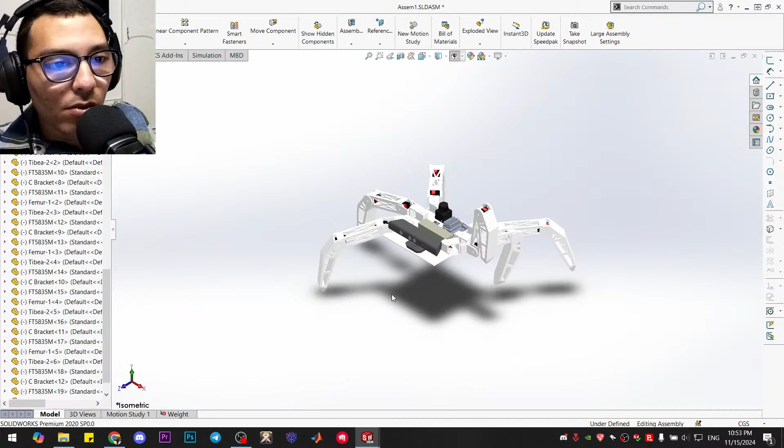Oi! Ah, just adjusting my seating.

Okay, last thing to do before we end it here. We're going for... did we save that? Yep, we saved that.

Last thing is to make these shorter. Where are we gonna do that? I think that? Yep. Instead of 0.2, let's make it 0.17. Something like that, I don't want to make it too short though. Okay.

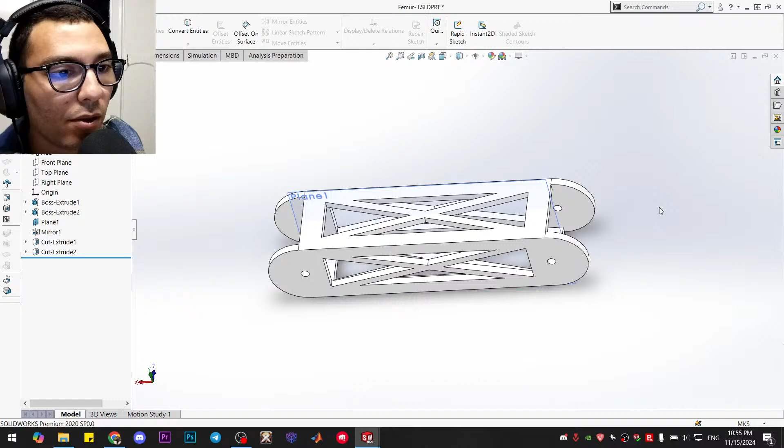Gotta fix those, where are those from? Boss extrude. Oh, 0.17. Nice. Okay.

Let's go check it out. Hopefully it doesn't mess with everything else in here. And it didn't, great. Yep, we still good. Yeah.

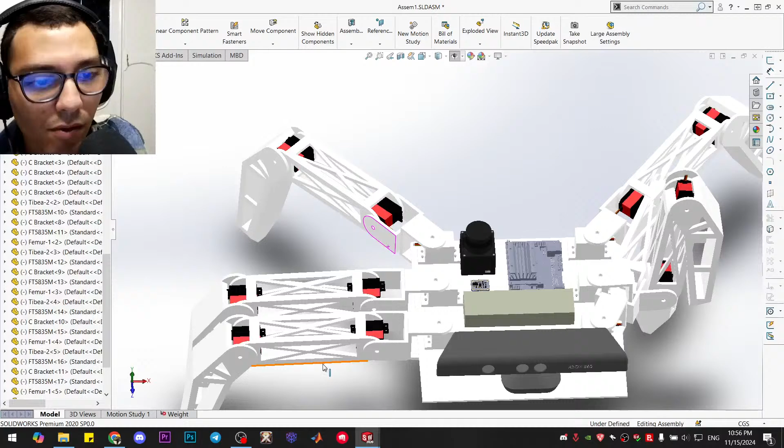Let's put them side by side. Side by side. Nice. Cool, so...

For now, this is everything that we're gonna do in this stream since we've been streaming for 2 hours anyways. Today's stream was a little bit tiring, but we made a lot of progress. The only thing that we need now is to fix the simulations, to fix the mesh and the stuff to see how it simulates, to basically make everything so it can simulate well. This is gonna take a little bit of time to figure out and remember how to do it, because I forgot a lot of SOLIDWORKS features, as I said before. But for now, it's been great, and we're almost done with the entire thing. As you can see, just a little bit of tweaks here and there, then onto the simulation, then onto actually printing.